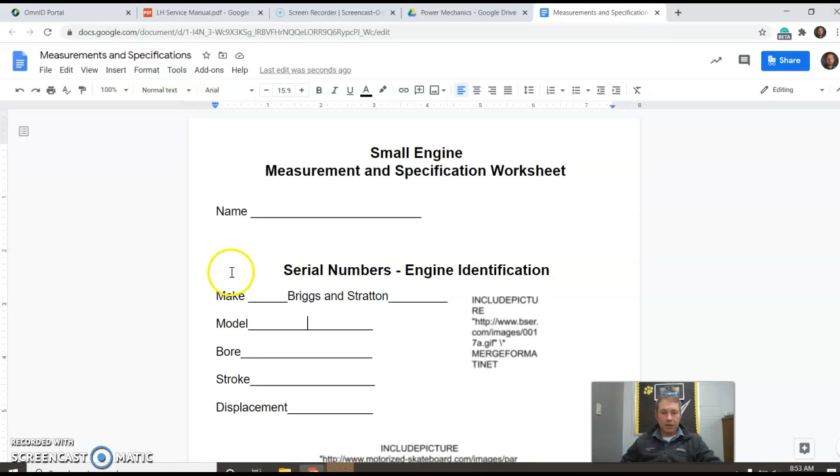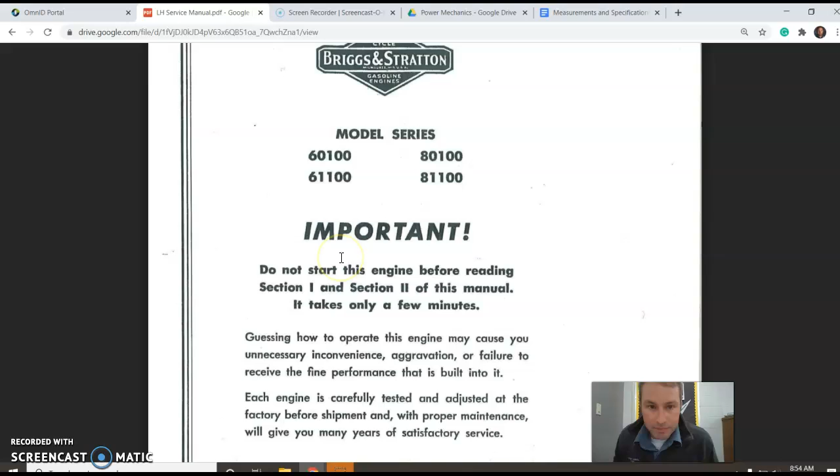The model, well, I've given you guys the model right here on the sheet, but it's a 60,000 series, model series. We're using, so the 60,100 would fall under the 60,000 model series. So just type in under the model, 60,000. Okay, bore, stroke, and displacement.

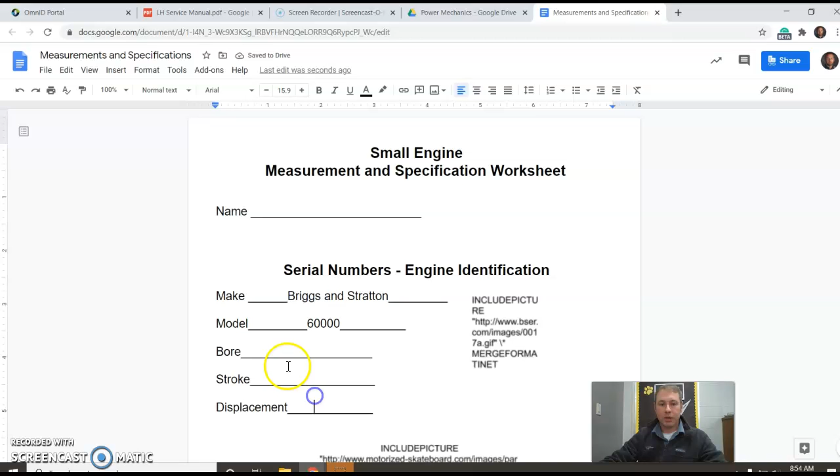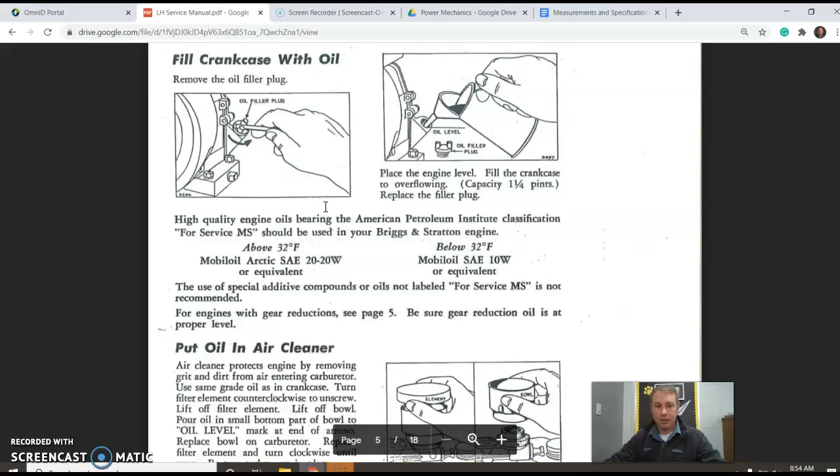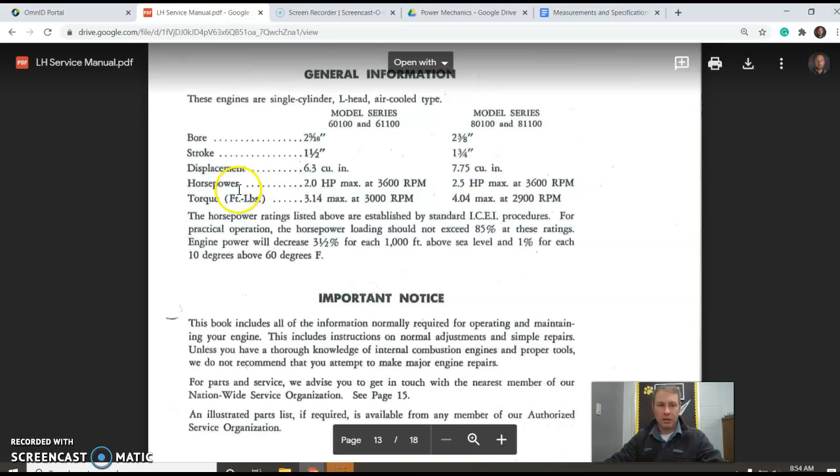All that can be found right here in this manual. You scroll through this. It is going to take you a little bit of time to dig down and find some of this stuff. But if you scroll through this, you'll get to the end, towards the end of this, and it will list your bore, stroke, and displacement. Record those on the sheet.

Okay, so you get the general information filled out. That's the first thing you need to do. What that does is it helps us identify what motor we're working with.

This is why I had you guys do a little discussion post looking up your lawnmower at home too. It's important you know how to identify the model and the series, and if you ever need parts for that motor, you can use that to order parts. You call down to CNS or a different store, order them online.

Okay, this is where we start getting into more detailed specifications. This is saying cylinder bore specification. B all the way down to here is done after we've measured our actual cylinder bore.

So if you're a hybrid learner, you'll remember we use a telescoping gauge when we measure the cylinder bore. We're looking for elongation and taper, to see if we're out of round, and if we have a taper like a cone on our cylinder, if the piston's worn that cylinder down. So that's what this second part here, B through G, covers.

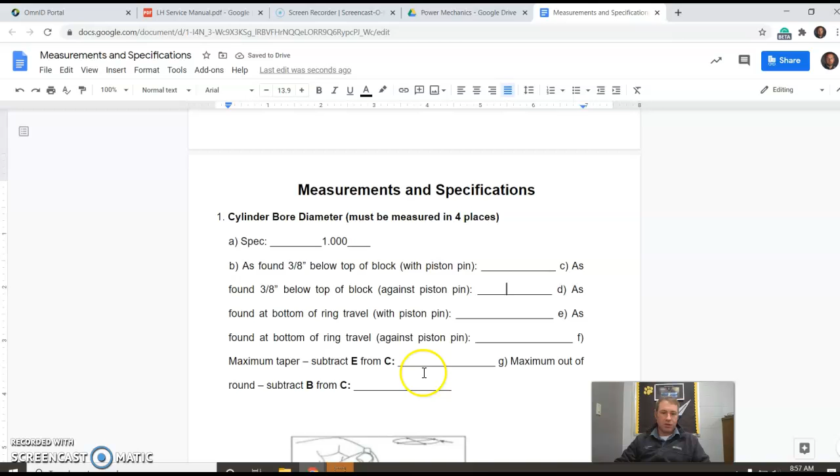So that's what a specification is. I've had some questions on that. You go through and fill these out — the C, D, E, F, G — when we measure, okay? So where do you find these other specifications?

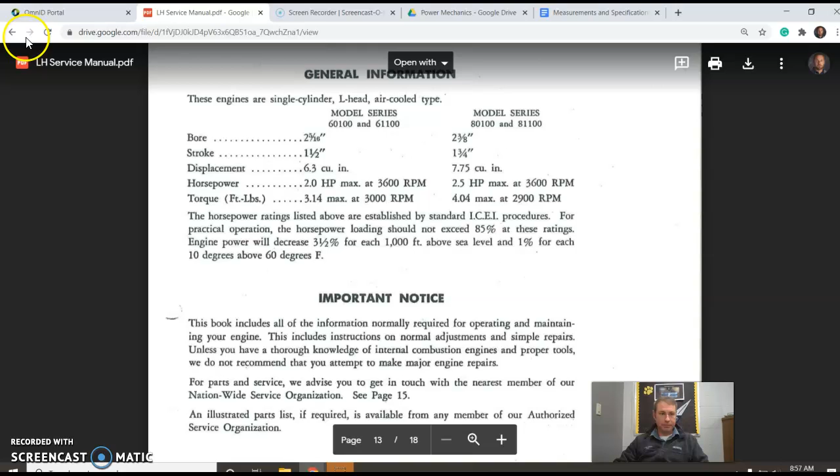We'll head back here to the resources, instructional resources. A lot of information can be found in the table of contents here.

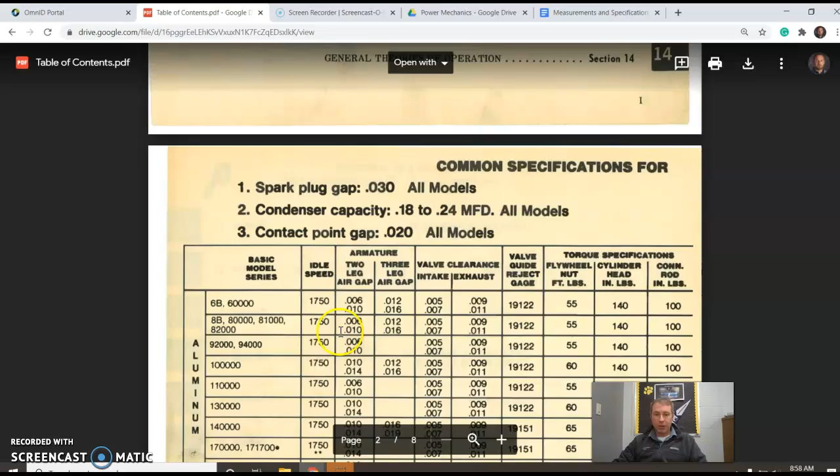Take a look at this chart, this is our 60,000 series. If we want to find any information on our armature, our idle speed, our valve clearance, valve guide reject gauge, different torque specifications, they're all along the top here. You will need to use some of that information as you go through the packet, so I want you to understand that it is available here in the table of contents. It's right here as well.

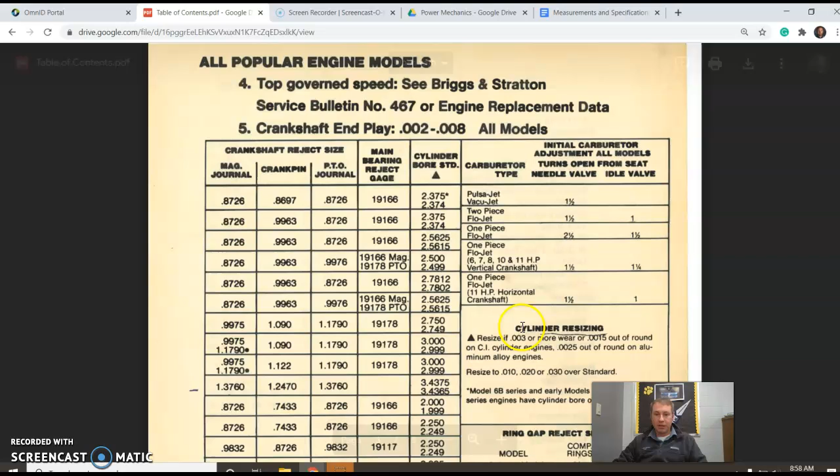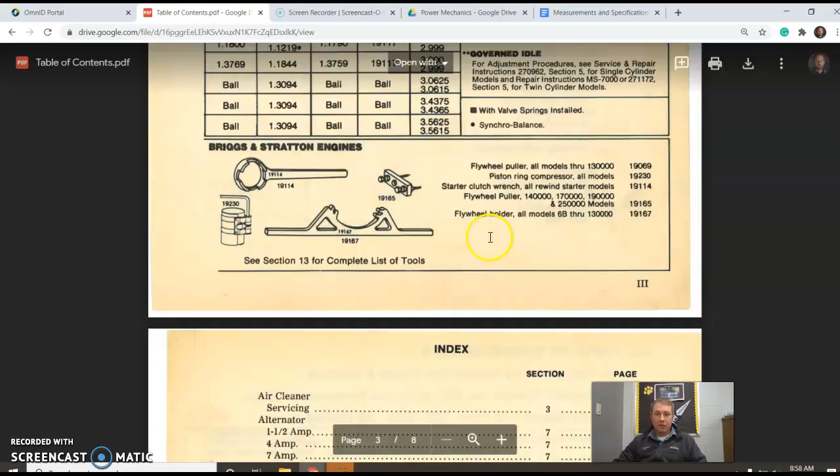There's some information right here on cylinder resizing, and some information here on ring reject sizes. So there's a lot of information just on those first two pages, but say we were trying to figure out the cylinder, we could go down here to cylinder and bearing specs. I've made this pretty easy for you, I've pointed you in the right direction. Cylinder and bearing specs, go through this.

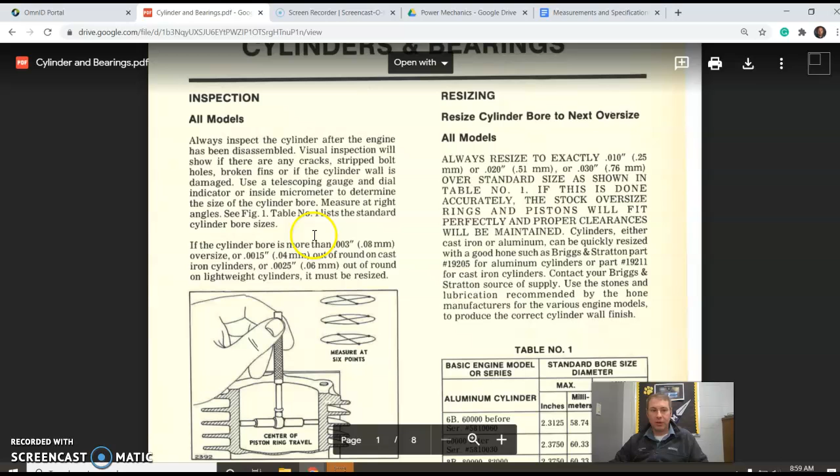And here we are measuring with that telescoping gauge the different points in that cylinder. Now, if we're wondering what our cylinder bore is, we want to record all of our measurements in inches.

So like standard bore size here, 2.3125 to 2.3115. So we have a little bit of a tolerance in there, not a lot, but a little. Looks like we got about a thousandth of an inch.

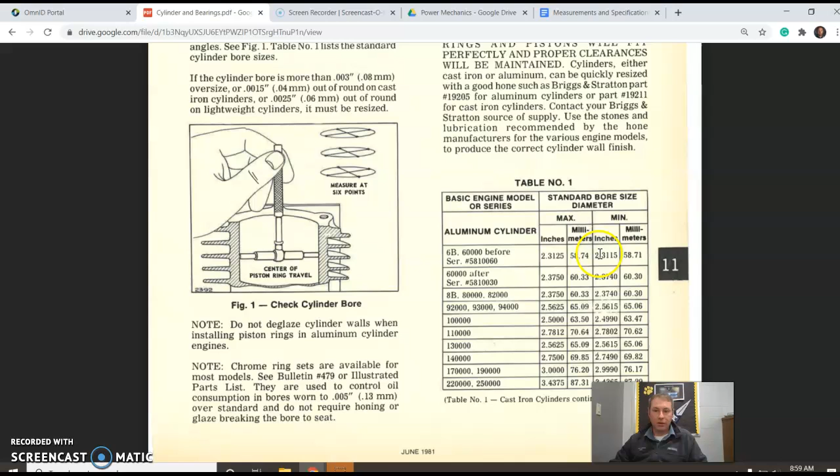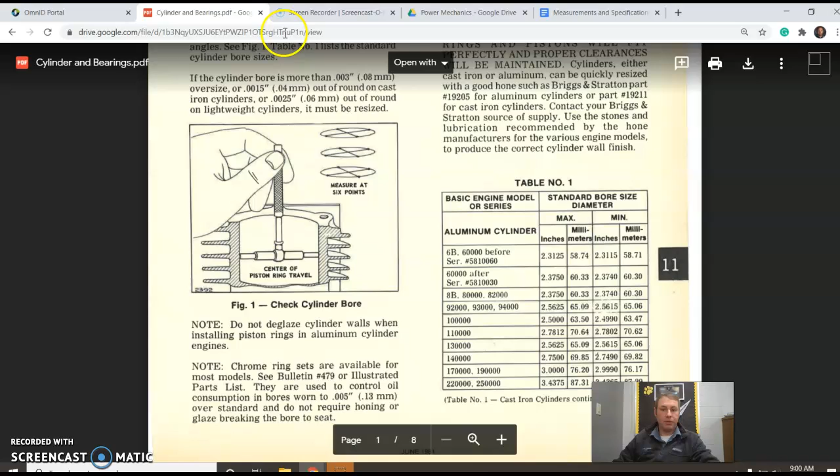So if we're going to write that in, we would just put in for our measurement, spec here is 2.3125 to 2.3115, and that's our specification. And then, like I said, the rest of these we'll do when we measure.

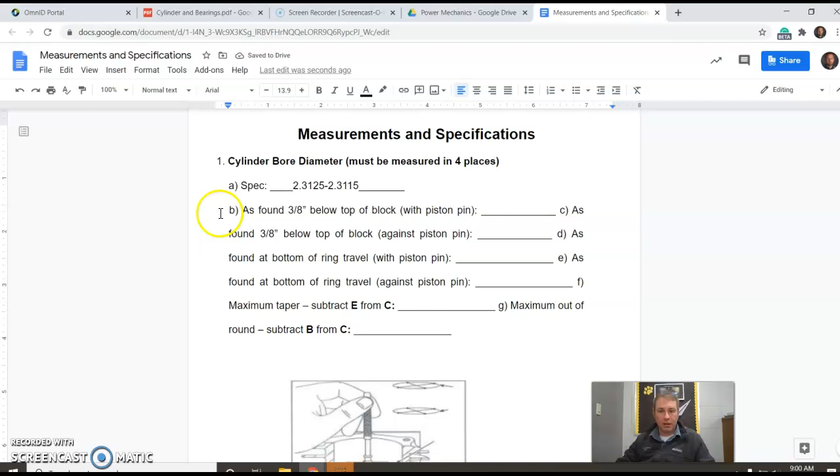So if you're a hybrid distance learner, you're just doing the spec, okay, piston land wear and so on. And then when you get down here to the valves...